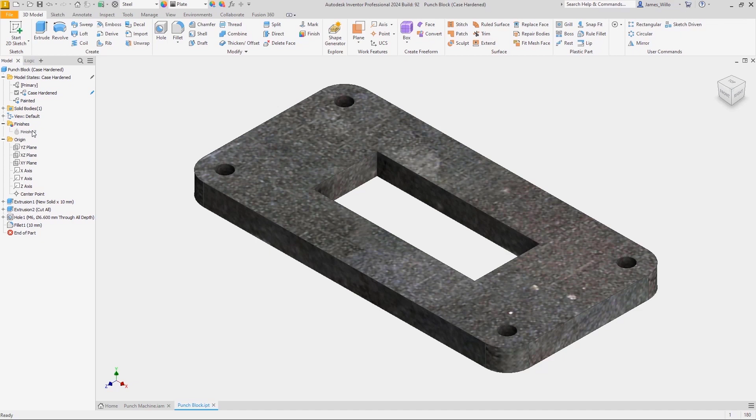In the browser there is a brand new folder created called Finishes, where we will see a list of all finishes applied to the part. This means we get a really great overview of the processes required for this part. And if we hover over the finish, it will highlight the areas of the part that it is applied to. Model states are also supported by the Finish tool, so when we switch between model states, we can suppress and unsuppress finishes. Also note that some value input fields also support applying a tolerance.

For the second model state, we'll just paint it. Choose the process from the drop-down. This could be powder coat, spray, roller, or any other method. Pick the appearance and then enter a description to be used later on in the drawing or 3D annotation environment. The paint thickness can also be specified. Choose the faces to paint, and that's the base coat for this plate.

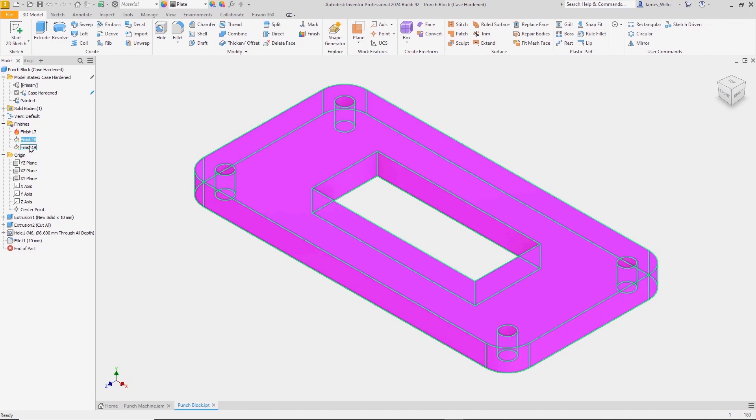Using the same model state, we're now going to layer a second process on top of that. This is something we couldn't do before with standard appearances. Apply the final coat of paint and add some notes. And then again we'll pick the faces we're going to paint. You'll notice that when I click OK, the blue paint will override the primer in the graphics area. And that's because finishes respect the browser order, so the finish at the bottom will always be the one that is visible. And of course, these finishes are controlled by the model states.

All values entered into the Finish command are accessible from the Parameters window, so we could use the values in here to calculate how much paint we need for an entire frame.

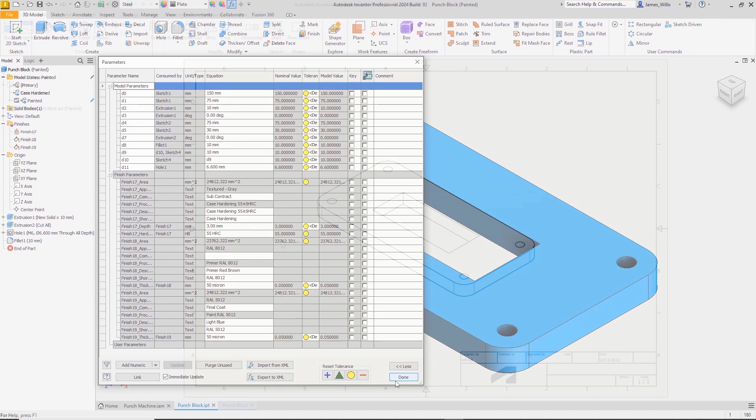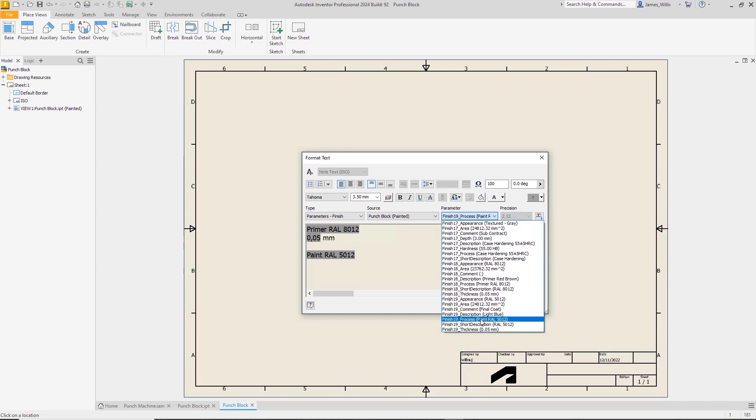And in the drawing environment, or model-based definition, we can retrieve the Finish information. A new type category in the Leader or General text box allows you to choose any of this Finish manufacturing information, allowing it to be automatically updated whenever a change is made. And by stacking these notes together, we can show the full manufacturing process in a single note, making it much clearer how this is to be made. All this and much more in Inventor 2024.